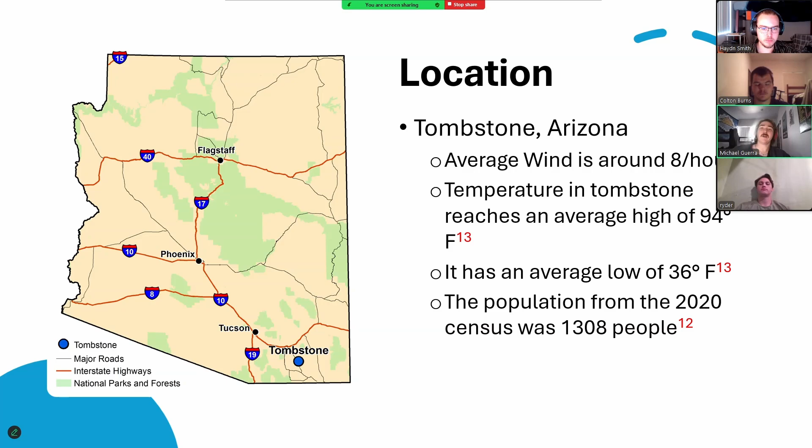The issues with Tombstone's water supply stem from several things. Among these are its isolated location, arid climate, yearly rainfall of 13 inches, and high tourism.

Tombstone's isolated location with limited rainfall leaves it lacking a reliable source of clean water. Tombstone's current water source is starting to run dry. Tombstone has used a river as a water source for many years, but in recent years it has slowed and been drying up. Although the population is small, Tombstone is widely known for its tourism, and with this tourism, the lack of water is ever more noticeable.

The residential population alone needs roughly 660 gallons of drinking water per day.

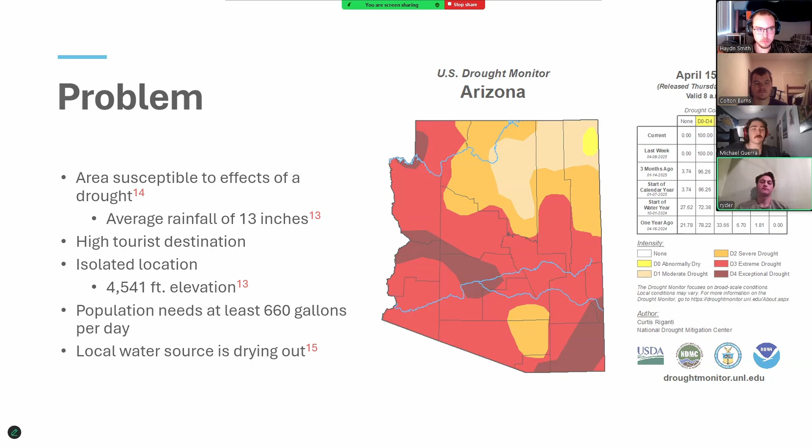This is why we are trying to tap into the underground aquifer and pool water to fill our tower. Additionally, we would like to collect a portion of the rainfall and attempt to recirculate that back to the community.

As Christians, we are called to care for those who are hungry and thirsty, and we have an obligation to ensure people's human needs are met.

As Matthew chapter 25, verses 35 and 40 demand: 'For I was hungry and you gave me something to eat. I was thirsty and you gave me something to drink. Whatever you did for one of the least of these brothers and sisters of mine, you did for me.'

We are driven to care for our vulnerable communities and love our brothers and sisters. Everyone deserves the opportunity to better themselves, but that chance becomes significantly harder when their basic needs are not met.

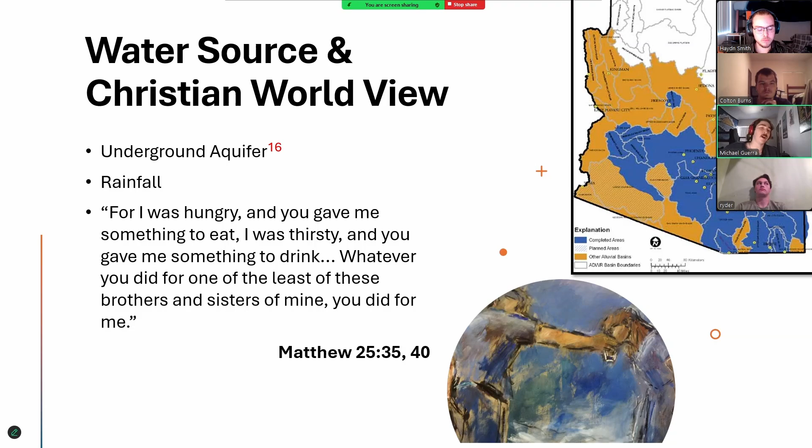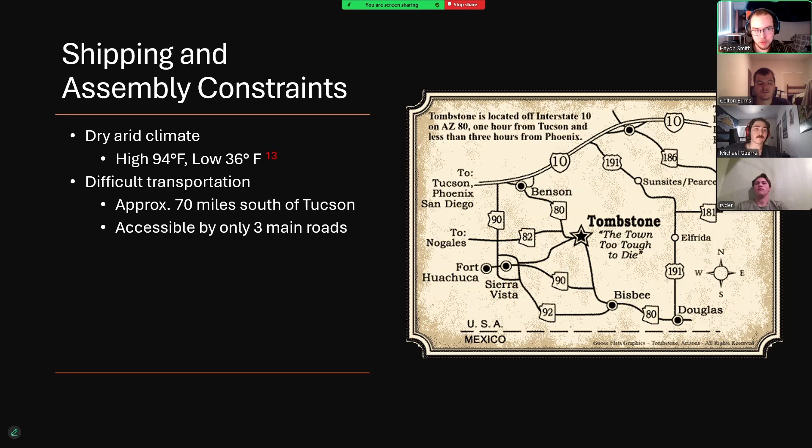For our shipping, design, and assembly constraints: due to extreme temperature conditions, as well as Tombstone sitting about 70 miles south of Tucson and accessible by only three main roads, delivery options for large components are limited. This requires us to optimize for modularity and efficient on-site assembly, as well as materials that can withstand these temperatures.

For our Design A overview, we chose galvanized 1040 steel to balance durability and capacity. The tank holds 71.7 cubic meters, or roughly 18,900 gallons, enough to supply water for about 28 to 29 days based on local demand.

The dimensions are carefully chosen for stability: 5.56 meters tall, 3.5 meters wide. The trusses themselves have two cross beams from top right to bottom left, top left to bottom right, with the vertical beam set to about 11.36 degrees offset.

The galvanized steel resists corrosion in Tombstone's harsh climate, while the compact footprint simplifies transport and assembly under the constraints we just discussed.

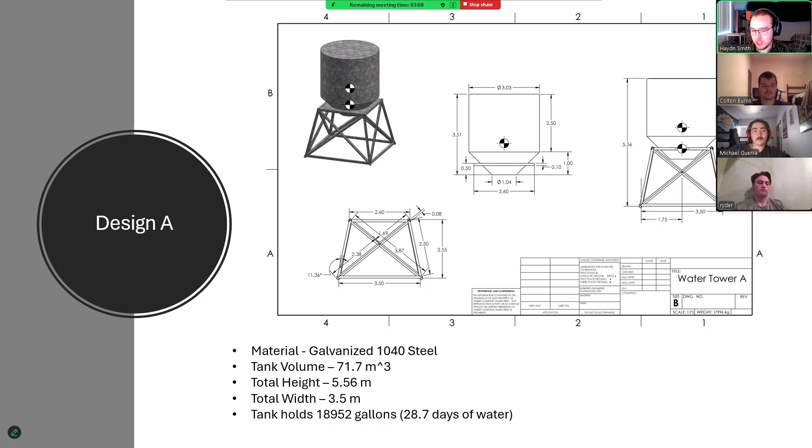For our simulations, the crossbeams showed to be zero force members and showed zero deformation under true scale conditions in SolidWorks.

Our baseline performance shows even stress distribution, confirming the design handles the tank's static load efficiently. Under the average and double the average wind, these results did not change.

The hand calculations for Tower A, as you can see here, were made from one face of the truss and were done on this graph paper.

We halved the wind load and quartered the tank force applied downwards. For Tower A specifically, we had a roller to the left and a pin to the right.

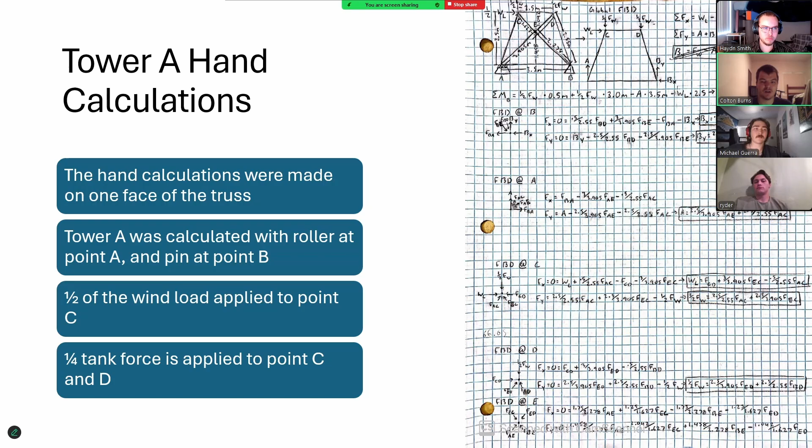All of these calculations were done in variable format so that they could be transferred easily into Excel to complete the rest of the calculations, as you can see here.

The design of structure B is very similar to that of structure A. We made sure to keep the materials, dimensions, and force loads exactly the same.

The only real difference between the two is that in structure B, we took out the cross beams and replaced them with a single diagonal beam. That beam runs from the bottom left corner of the base to the top right corner.

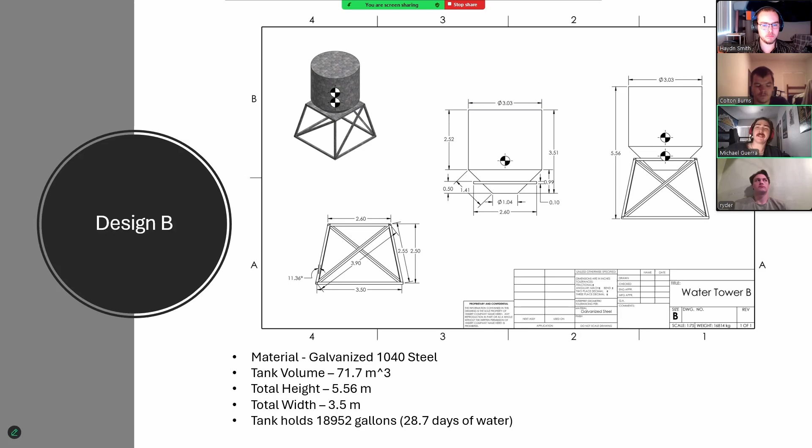This setup lets us see how that one design change affects the overall strength and stability of the structure, while making it more affordable to produce because there is less overall steel being used.

When looking into the simulations, we used a true scale simulation and ran it under very specific conditions. We tested three main wind scenarios: no wind, average wind, and double the average wind.

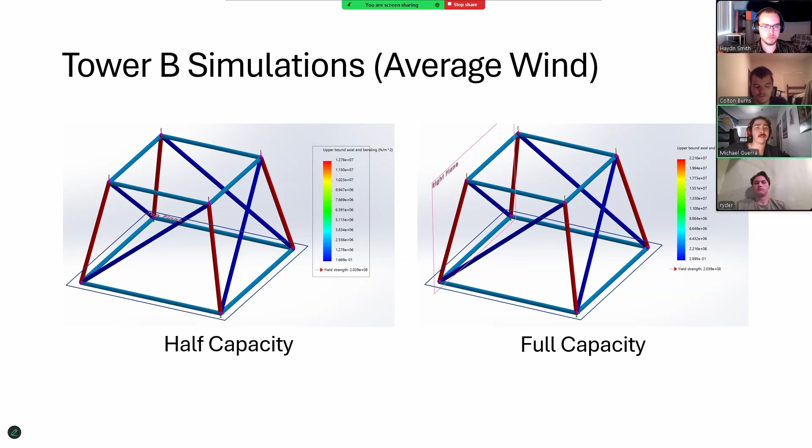For each of those, we also ran sub-simulations to see how the water tank would perform with only half capacity and then with full capacity. This gave us a more complete picture of how the structure holds up under different levels of stress and environmental pressure.

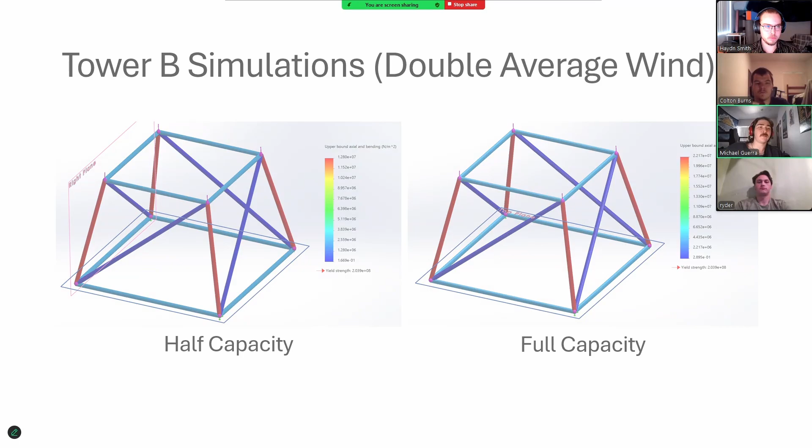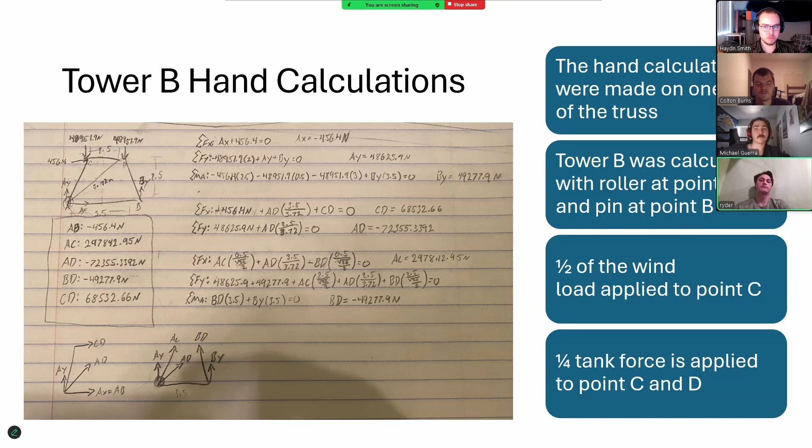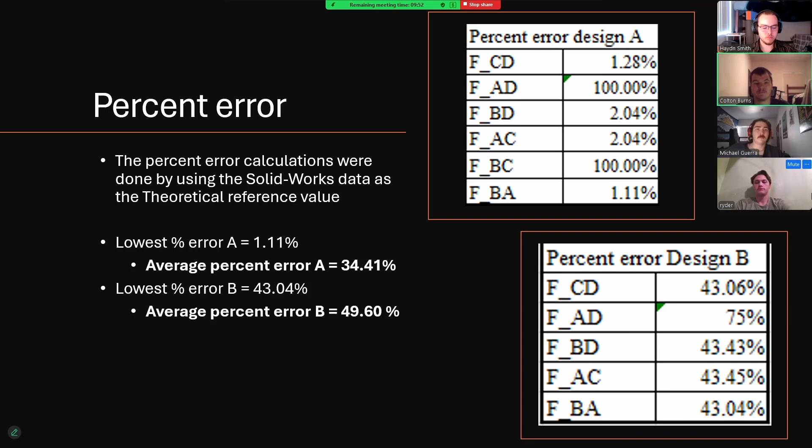For our design selection process, Tower A's galvanized steel construction does carry a premium, about $1,400 more than Tower B, but this investment buys a critical advantage. Tower A's average percent error in simulations was 34%, significantly lower than Tower B's 49%. This means more predictable behavior under stress. The added crossbeam in Design A creates a stiffer base, crucial for handling Tombstone's temperature swings and wind loads over the decades. In infrastructure, reliability outweighs short-term savings. Tower A's durability and lower margin for error make it a clear choice for Tombstone's water security.

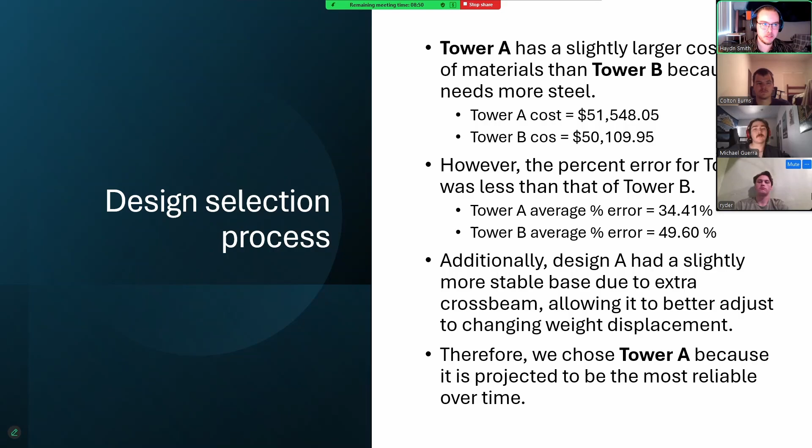We made sure that all the essential building materials, such as steel, concrete, pipes, and bolts, were factored in, and we also considered that the equipment needed by the crew, such as welding tools, excavators, and cranes, were included on the budget sheet. Once the tower is built, we want it to last and truly serve the community and not fall apart over rust and time. That is why we are using sealant and primer paint to prevent corrosion, and we also want to make sure every worker gets the proper personal protective gear to keep the job site as safe as possible.

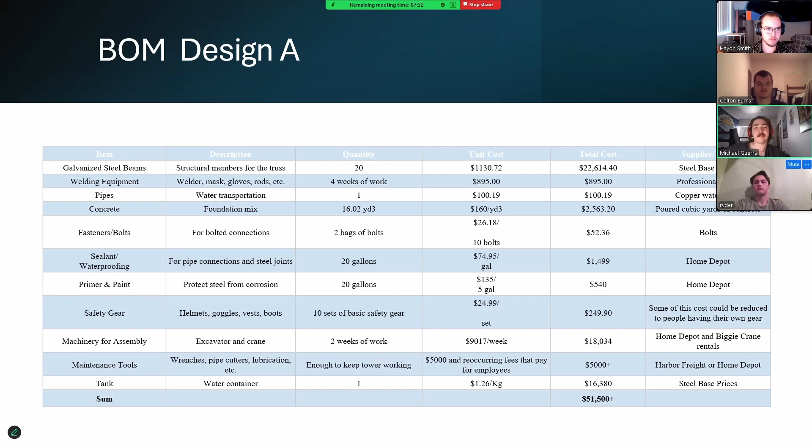To start the assembly, we must get approval from the state to build the water tower and approval from the water department. After this, we will gather funds and hire a team that knows how to build the structure. We will buy the materials needed and rent the tools we'll need to assemble this, bringing everything to site and organizing it so we'll be ready to move as quickly as possible.

We'll build the tower frame by connecting and welding the beams together and attaching the water pipe that'll carry the water from the tower to the town. Seal all the pipes with silicone at the metal connectors and paint the outside of the tower with primer paint to stop it from rusting and corrosion. After any final safety parts like ladders and access panels are added, a schedule will be set up to maintain the tower.

Thank you. Thank you. Thank you.